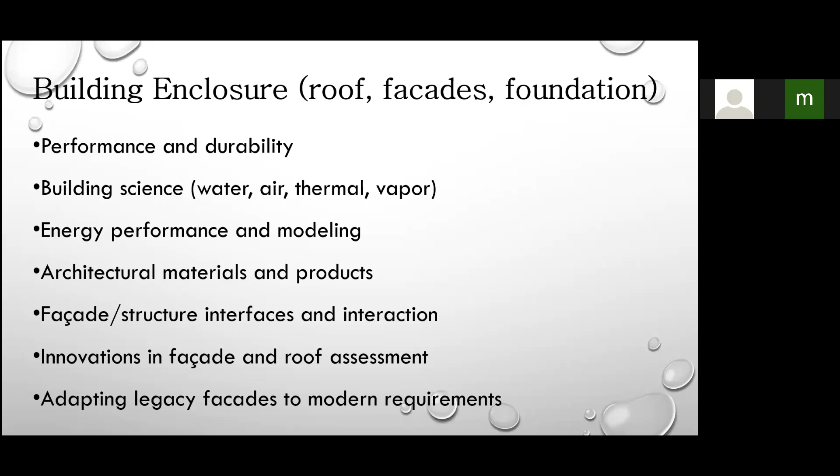Architectural materials and products, facades, structure interfaces and interactions, innovations in facade and roof assessment, then adapting legacy facades to modern requirements. These are building enclosures within the building, and these are relevant to forensic engineering.

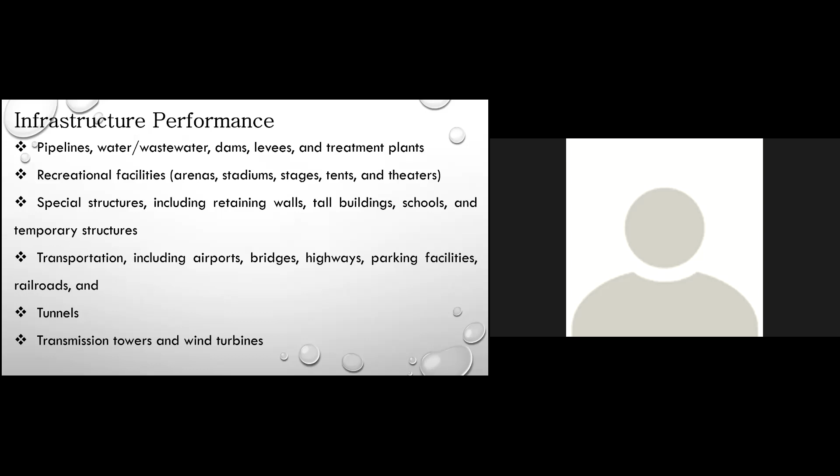Infrastructure performance covers pipelines, water and wastewater—particularly these areas I will discuss in my second presentation—dams, levees, treatment plants, recreational facilities, special structures, transportation including airports, highways, parking facilities, tunnels, transmission towers, and wind turbines.

The natural disasters and extreme conditions: failures caused by tornadoes, hurricanes, earthquakes, tsunamis, blast and impact loading, fires, risk management, emergency response, lifeline engineering. These are the areas or components coming under natural disasters and extreme conditions.

Technologies for forensic investigations, that is the emerging technologies: machine learning, part of artificial intelligence or AI, and building information modeling. Nowadays this has become very popular, particularly in the architecture area.

Structural health monitoring has become extremely important because several government infrastructural projects are being carried out and constructed, where third parties, reputational institutes or organizations, get involved in checking the structural health.

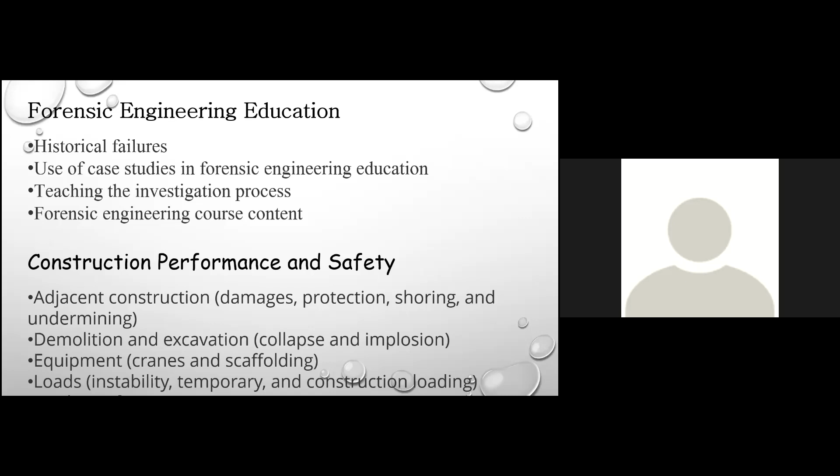Construction performance and safety - I'm not detailing those things, you will get them in my PPTs.

I think the screen is clear to all of you, right? Is it readable? Yes sir.

Okay, fine, so just one small example to give here. When I had been to West Indies, in Trinidad, and I was roaming around the UK and some institutes or organizations, professional agencies in UK, I just happened to ask what is the chance of failure of a bridge or a building in the UK, say. So the expert engineers of a particular organization told that...

They were actually surprised, asking why I was asking that. I told them there is always a sort of likelihood of failures. Then they told the team that possibility is very rare, in our system it is very rare, because our engineering ethics or code of conduct is strictly adhered to, because without which you will not get the professional degree by which you can practice civil engineering.

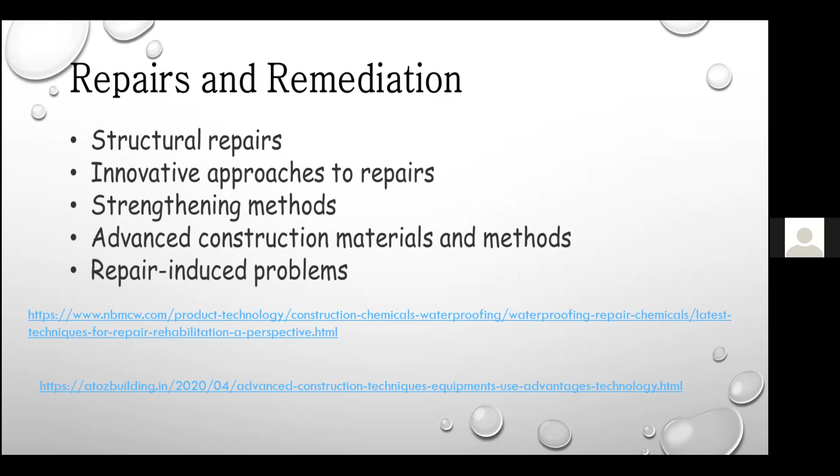Now, concrete, as you know, is widely used: precast elements, and in situ for walls, floors, foundations, etc. And there are some Eurocodes and the equivalent codes here.

That is actually guarding the screen. Can anyone remove that, because it is guarding my presentation here on my screen. Anyway,

that is IS 1199-516, and there are other codes also. I will give the numbers of the codes later. So with regard to strength, durability, resistance, movement tolerance, etc., when the installation is done, forensic examination is required.

Can I? Oh, right. Now it is okay.

Now, there are a number of techniques available for forensics and failure analysis, which may be split into two categories: site investigations followed by laboratory analysis. All of you know that this is nothing new. Site investigations start with an initial desk study based on information: the topography, the site plan, the key plan, then the design, then the drawings, GA drawings, general arrangement drawings.

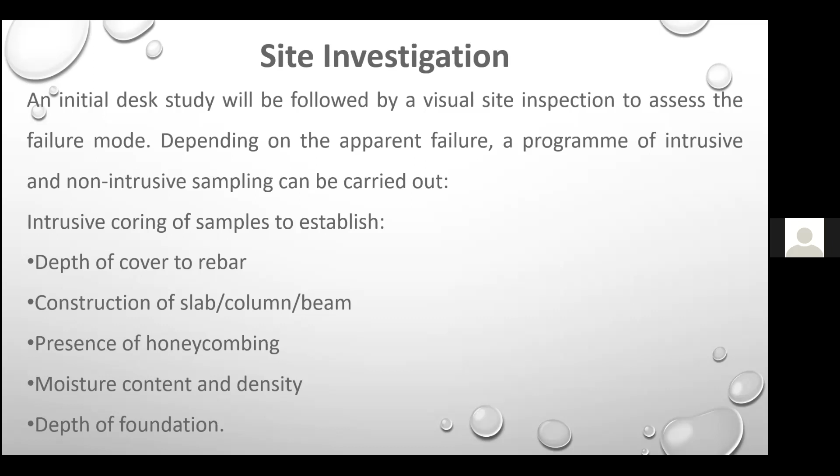So these are the intrusive sampling, while non-intrusive investigation includes mapping of rebars using Hilti Ferroscan. I don't know how many of you are familiar with the Hilti Ferroscan or other ferroscans. Hilti is a special group attached to that, so it is a sort of ferroscan basically.

So I'll show short videos on this ferroscan, then the ground penetrating radar or GPR, then estimating the compressive strength using Schmidt hammer or Windsor pin, presence of movement joints, drop hammer testing of screeds to establish strength, slip and skid testing of surface, particularly in highway engineering, and half cell potential also.

So some of these are defined here. For example, the half cell potential is used to determine the probability of corrosion within the bar in reinforced concrete structures. And movement joint videos I have included in my PPTs; I will show that. And to assess if your screed is adequately compacted, in case of highway construction. Now here, this is a video where you will see this one.

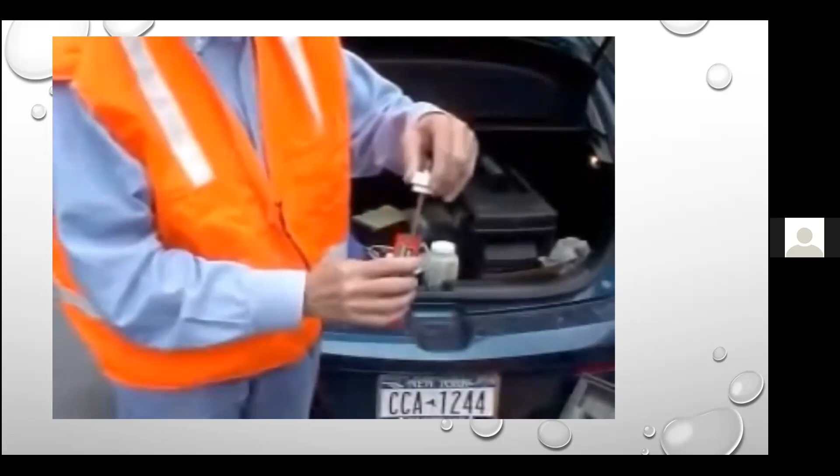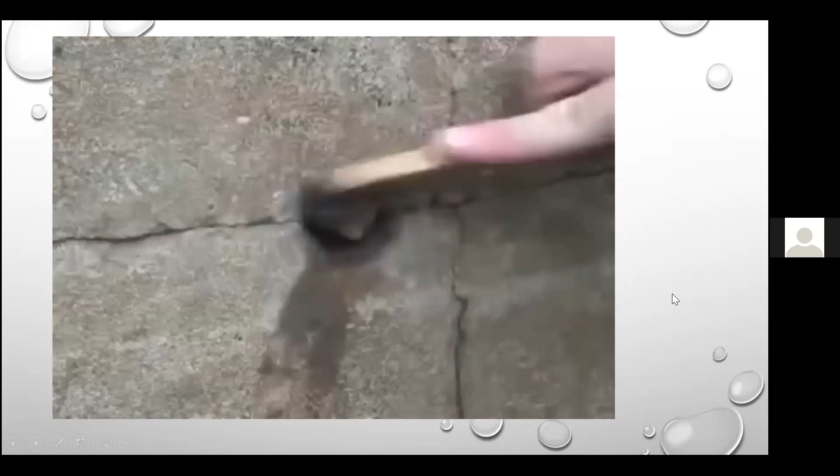Just let me know whether... I think this video is not audible, right? Is it audible, sir? Is any voice there for this video? Are you not able to hear this? No, I'm not able to hear this. Okay. Participants, can you hear? Just one moment. No. It's not coming. No, sir, no voice is there. Still no, sir. Just one minute. Can you hear now? No, sir. I don't know why; it is the audio setting.

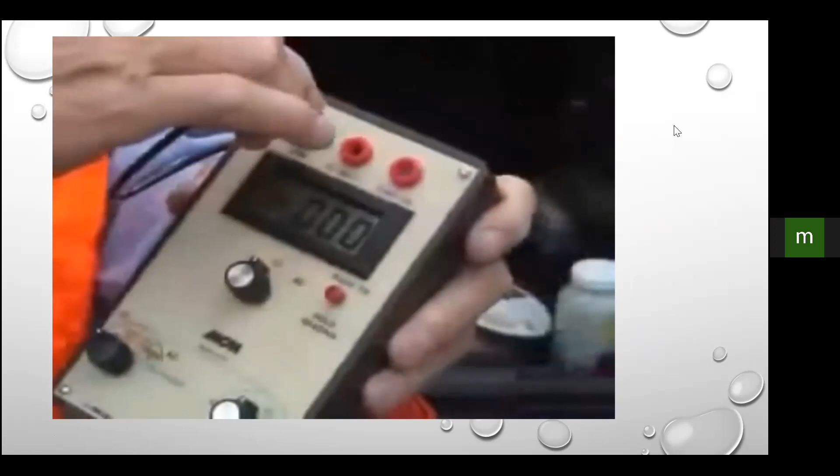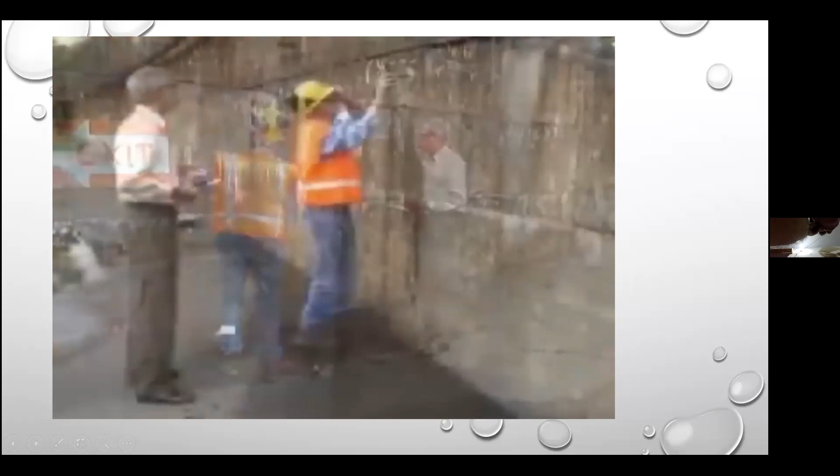Can you see? Can you hear? No, sir. We can see, but it is not audible actually. We can't hear any voice. You can't hear? Yes, sir. I don't know actually how to fix it. But you can see, right? Yes, sir, we can see. Can anybody help in this regard? We can see, but you just explain this one. It is not audible to us, so you can explain the things.

A wet sponge is placed between the porous plug of the half cell and the concrete wall to complete the circuit. Potential measurements are taken. This is a demonstration of ASTM C876, the standard test method for half cell potentials of uncoated reinforcing steel in concrete.

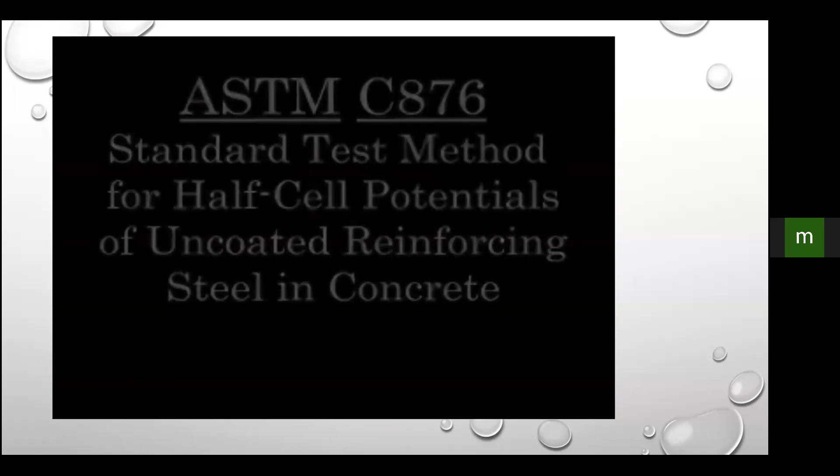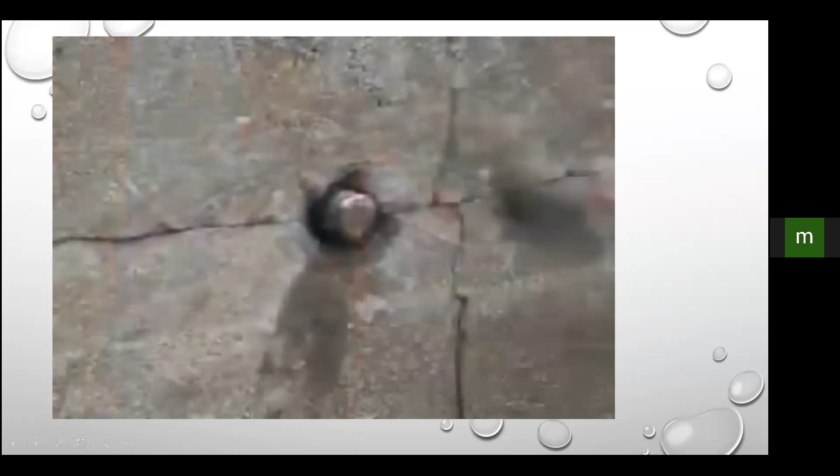A copper sulfate solution is poured into the half cell container. A 1/4-inch diameter copper rod is then immersed into the copper sulfate solution and the cell is sealed. The half cell is then screwed onto a voltmeter, and the protective cap is removed to expose the porous plug at the end of the half cell. The negative lead from the half cell is connected to the voltmeter, and a long positive lead is also connected. Rust is first cleaned off of an exposed reinforcing bar protruding from the concrete area to be tested.

The red positive lead from the voltmeter is then clamped onto the bar. Prior to measurements, a grid is laid out with 1-foot spacing spanning across the concrete surface to be tested. A wet sponge is placed between the porous plug of the half cell and the concrete wall to complete the circuit. Potential measurements are taken at each intersection along the grid.

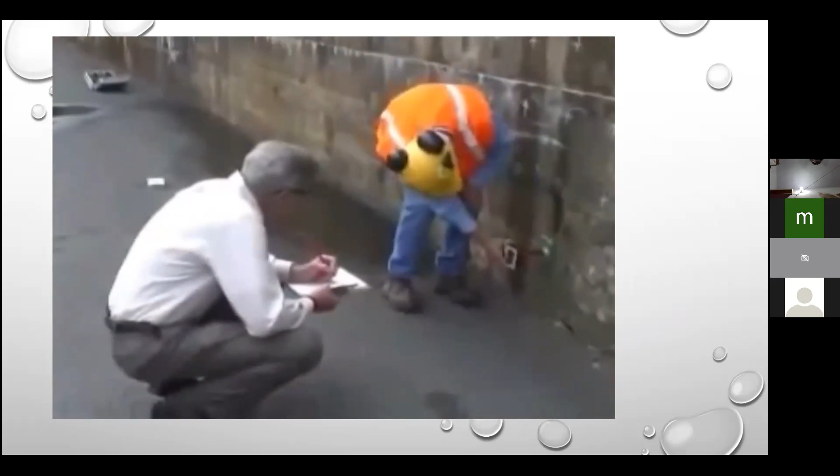The measurements and their corresponding locations are recorded, and this data is used to generate a contour map of potential corrosive sites beneath the concrete surface.

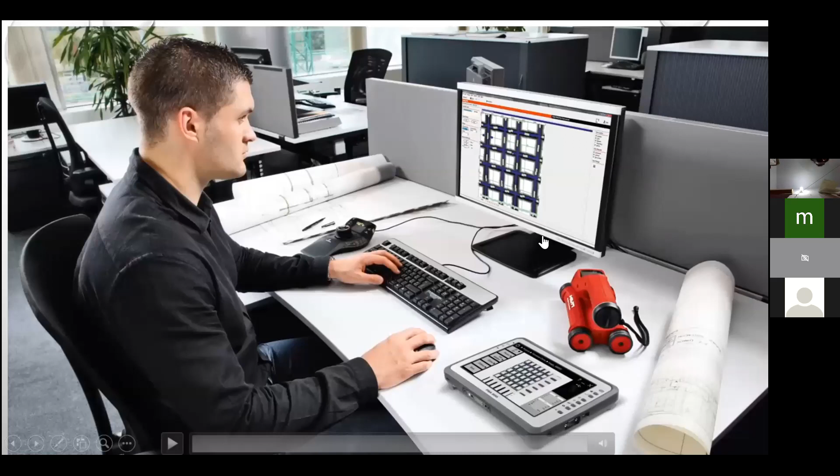So I think all of you have been able to hear and see the video. Yes, sir. Okay, good. So now the next video I'm starting.

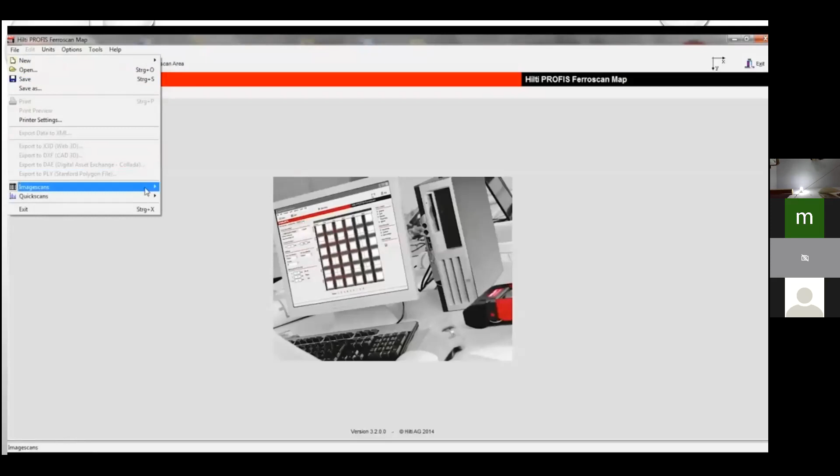This tutorial provides an overview of the Hilti Profis Ferroscan map software and explains its main applications. Please point out if you cannot hear. This software is designed to arrange multiple image scans or quick scans recorded via the Hilti Ferroscan on a virtual wall. The resulting map shows the rebar layout and depth of concrete cover. Different colors can be assigned to indicate and visualize individual depth layers. The area visualization and provided statistics give you a solid foundation to form your decisions.

Now we'll go through how to optimize the handling of large amounts of scan data. First, the scan files need to be analyzed in Profis detection before you import them to the Profis Ferroscan map software. This step enables the processing of scan files from a complete project. In the Profis detection software, the Ferroscan batch processing function automates the analysis of large amounts of data. After the batch processing is complete, you can open the Hilti Profis Ferroscan map application.

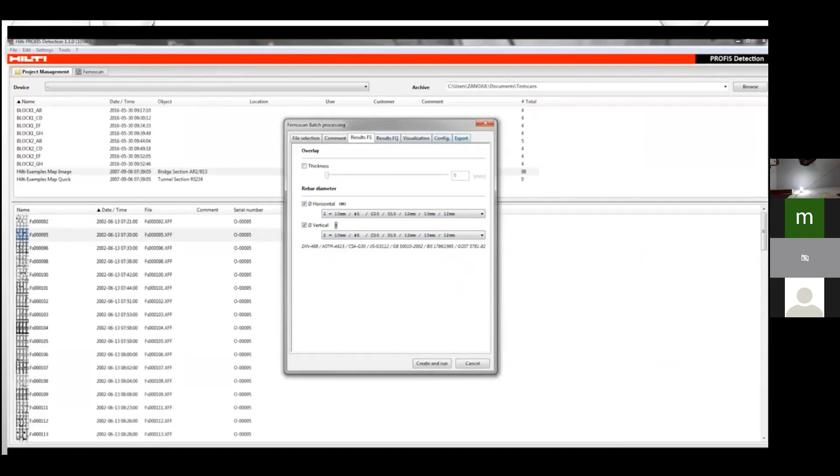Within the application, you can change the basic settings for language, length unit, metric or imperial, preferred color map, and the archive folder. The color map allows you to assign color codes to different depth ranges for better visualization of areas with inadequate concrete cover. The toolbar includes options for opening an existing Ferroscan map project or creating a new map for quick scans or image scans. Let's create a new map to show how these features work in practice.

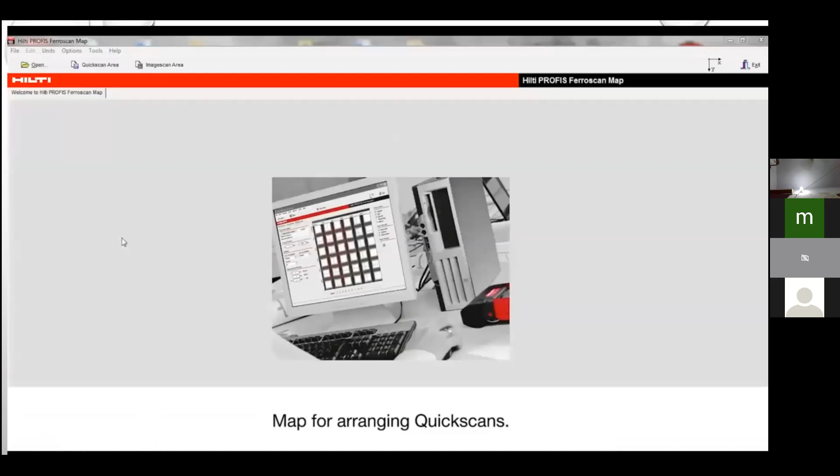Create a new map file by clicking the Quick Scan Area button. Enter the project information in the virtual wall properties, including dimensions and the distance between the scan lines. Select a project folder from your archives and import the analyzed scan files for mapping. To arrange the scan files in the correct sequence or order, select Advance Direction and Scan Direction using the arrow symbols. The start position where the first scan will be inserted is shown.

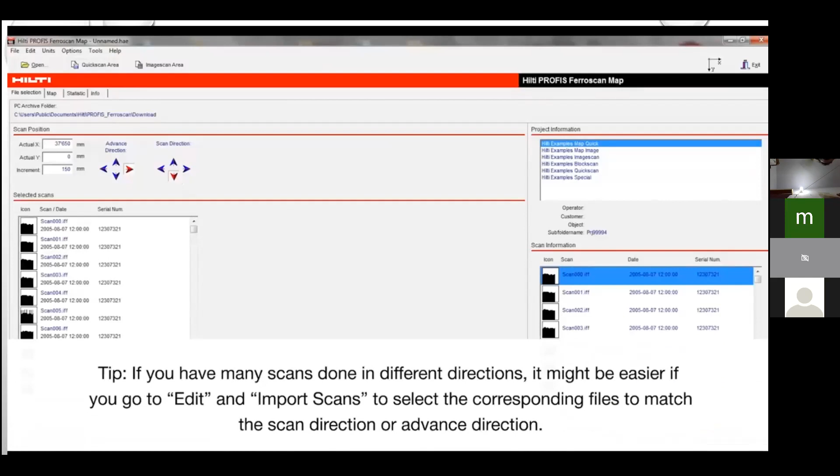The upper left corner is the default point of origin for the map visualization. Each subsequent start position is advanced to the amount in the Advance Direction increment field. The scan direction is the starting position of the quick scan recorded via the Ferroscan. Depending on the sequence scanned, choose to add selected scans individually or add all scans. Once you've placed the scan files, the multiple quick scans will appear arranged on a virtual wall for depth of cover analysis. In large area visualization, use the zoom function to see more detail.

Remember, you can adjust the map's color code according to your needs and preferences. A good first step for evaluating the area is looking at the statistics overview. This may give you ideas for setting the color map and further processing of the viewing settings. These statistics results are dependent on

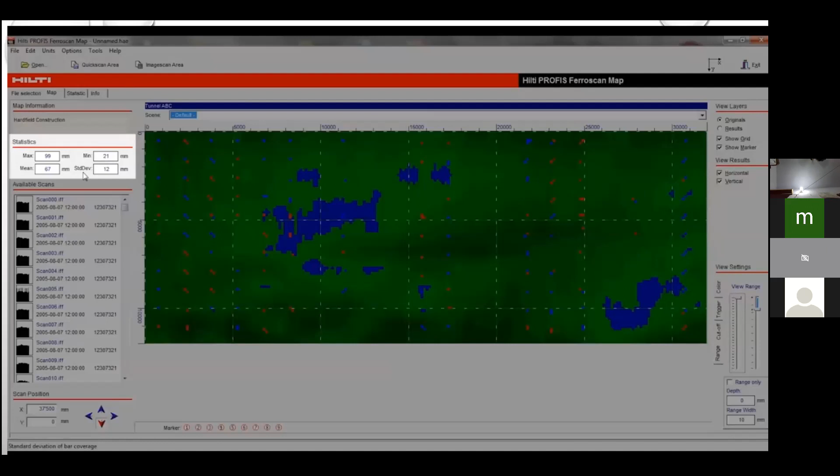Hello. Yes, sir. So it was audible? Yes, sir. It was audible. Okay, okay. But where is my PowerPoint? So again, you can share your screen. Actually, yeah, I have to now. Yes, sir. It is visible, sir. You can do it full screen. Yeah, it's okay, right? Yes, sir. So I should go back to the.

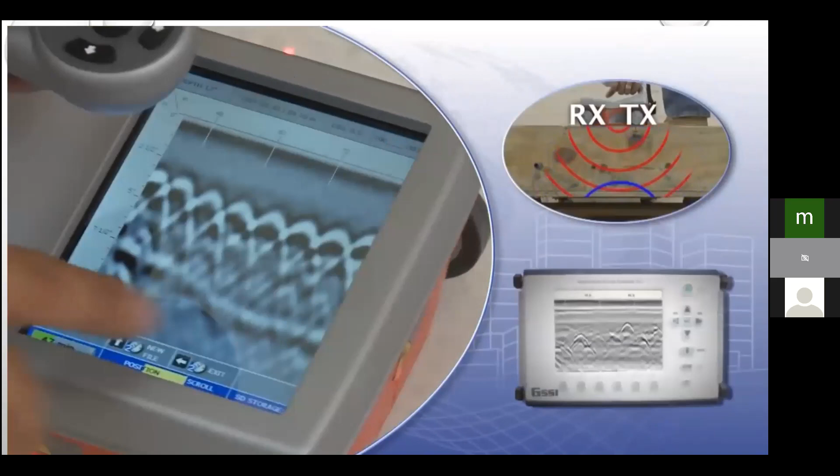Now the video is not playing. Lost. You are not able to hear, no? No. Yeah, just now. No. Can you hear? No, we can't hear. You can't? No, sir, we can't hear. We can see, but we can't hear.

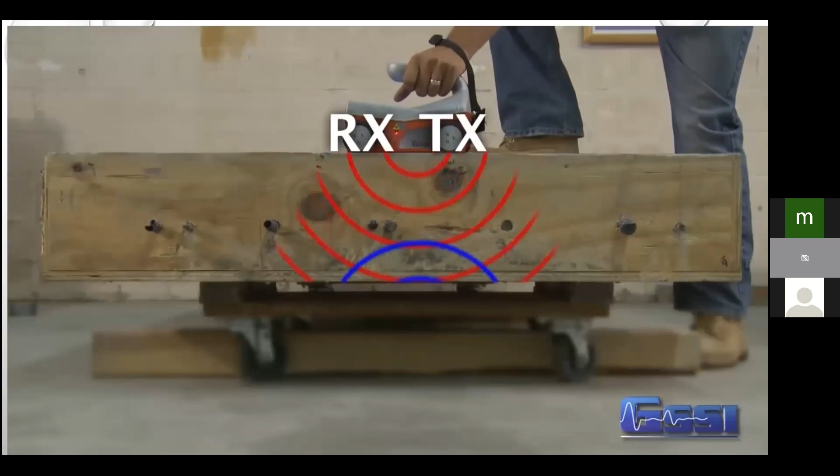Systems are typically comprised of three elements: the control unit, the antenna, and the survey encoder. Depending upon your application, your GPR system may differ from the one illustrated here. For example, the StructureScan Mini contains all three components in one dedicated system. The antenna has a transmitter and a receiver. When the signals are returned to the antenna, we record a two-way travel time and the amplitude of the signal. The amplitude is simply the strength of the signal coming back.

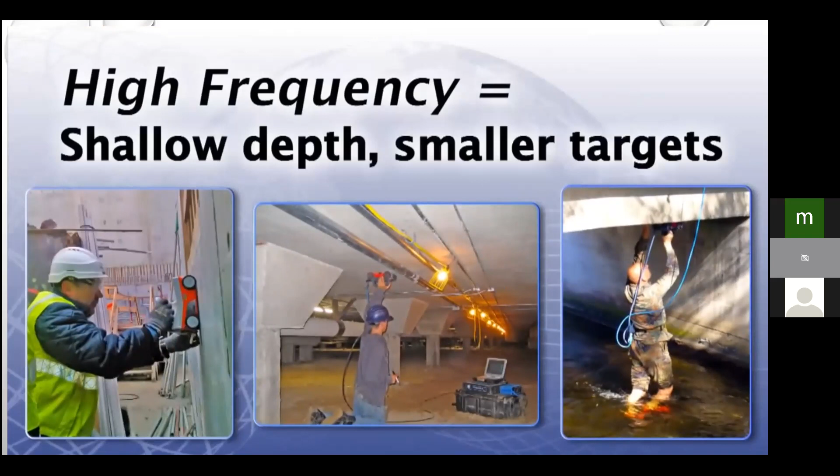Antennas come in various frequencies, depending upon your application. High frequencies are for shallow depth and small targets, ideal for concrete applications. Low frequencies are for typically deeper depth and larger targets, such as utility, geological, and archaeological applications. Survey areas with high conductivity can limit the depth and effectiveness of ground-penetrating radar. An example of this would be clay soils, or uncured or green concrete.

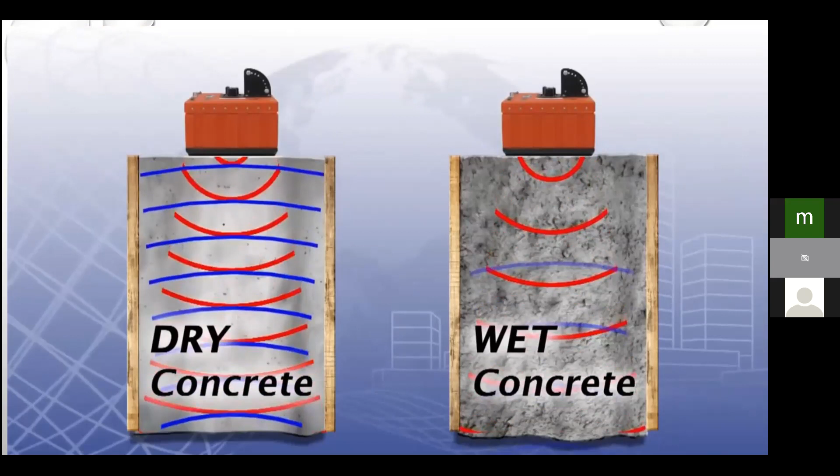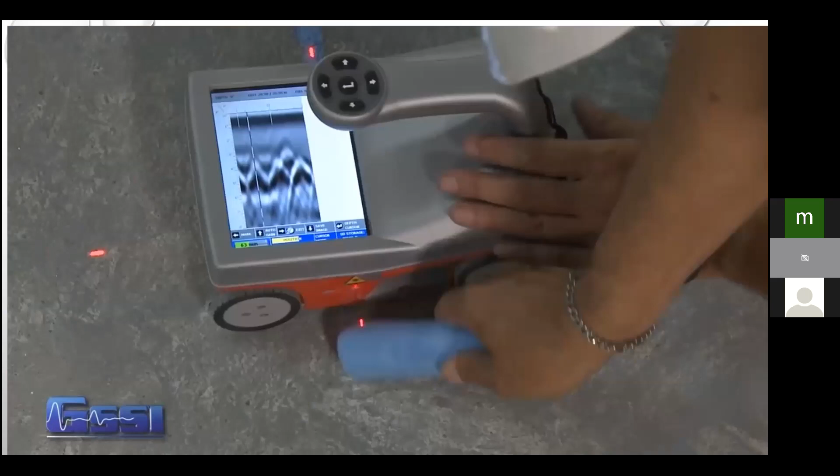Through different mediums, a value is assigned to these mediums to represent different velocities of radar. This value is called dielectric. Dielectric is important so the depth of targets or layers can be accurately estimated. Air has a dielectric of 1, which means radar travels fastest through air. Water has a dielectric of 81, which means radar travels slowest in water. Every medium in the world falls somewhere in between.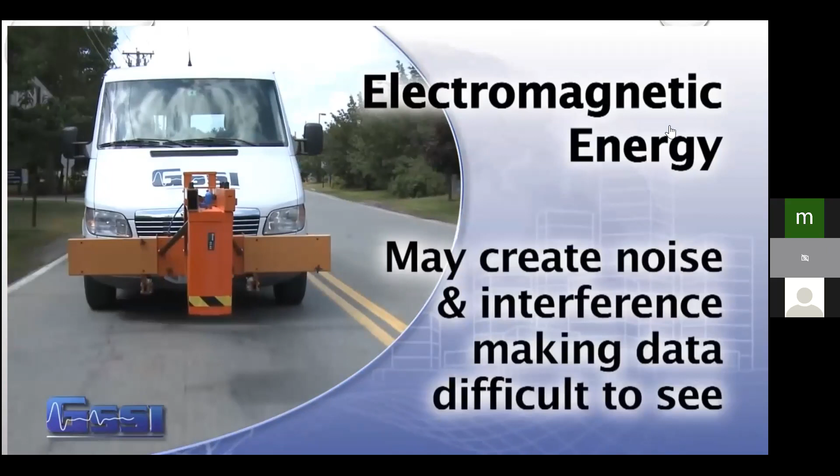Lastly, remember that GPR is electromagnetic energy. Other sources of electromagnetic energy, such as cell phone towers and two-way radios, may interfere. These will not cause any damage, but may make it more difficult to see deeply into concrete or soil. In addition, unlike X-ray or other technologies, ground-penetrating radar is not harmful and has no site restrictions associated with use. This brings us to the conclusion of the theory and fundamentals of ground-penetrating radar. For more information on data interpretation and specific applications, please visit www.geophysical.com. Thank you.

So, was it visible or not? I am not sure. Yes, sir. Hello? It was audible and visible. Okay, fine.

So now you have seen 3 videos. One was related to the half cell potential to determine the corrosion probability or the extent of corrosion. The second one is the ground penetration or the ferroscan. Hilti is a company, the Hilti ferroscan; they are specialized in this field. And the third one is the ground penetration radar. So these 3 you have seen.

So let me now go to the next slide. Is it clear? Is it visible on the screen, the slides? Yes.

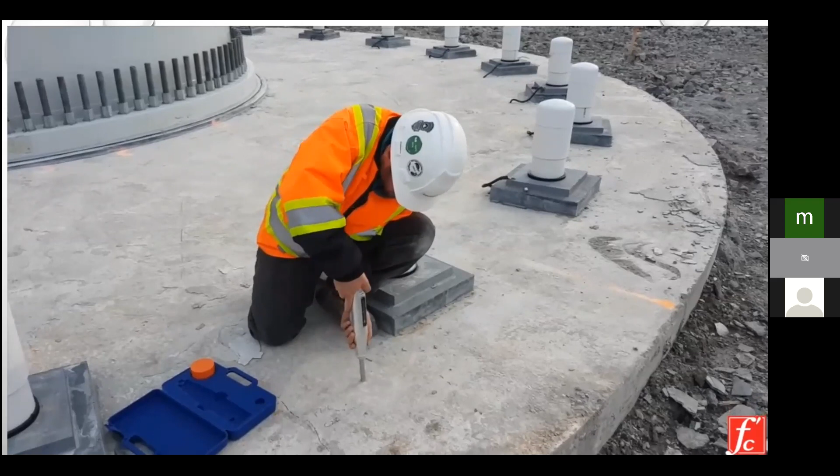In this video, we'll be covering a quick review of the rebound hammer testing method. Since its introduction in 1948, the rebound hammer has become extremely popular, mainly for its simplicity and ease of use. It is an inexpensive and quick method for non-destructive testing evaluation of concrete hardness. The main applications for the rebound hammer are to assess the in-place uniformity of concrete and to estimate the in-place strength of concrete if a correlation is developed. As listed, there are several standardizations that currently exist for the rebound hammer.

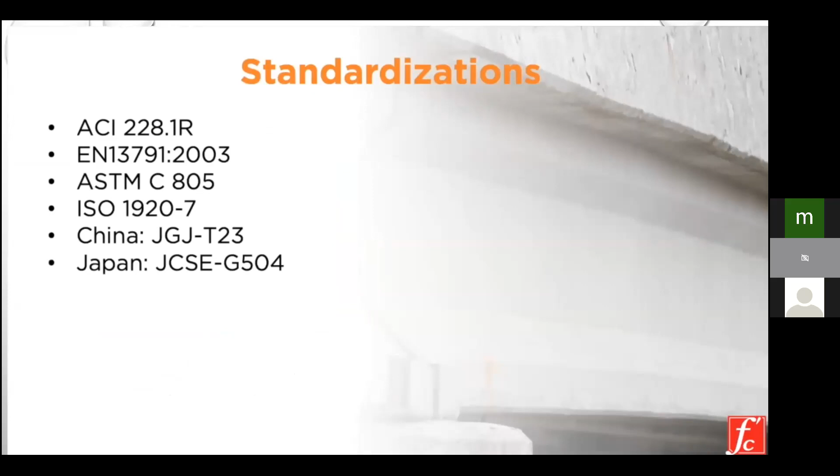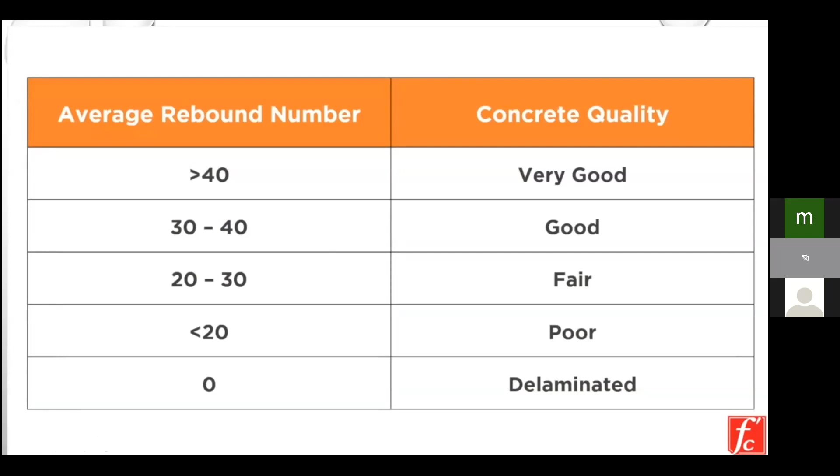In order to test, the plunger is pushed against the concrete perpendicular to the surface. As the hammer body is pushed towards the concrete, the force causes the latch to release and make an impact on the concrete. Essentially, the rebound of the spring-driven mass is measured after its impact with concrete surfaces. The output of the rebound hammer is then referred to as the rebound number, and this is correlated with the surface hardness of concrete. A higher R number means higher concrete hardness. The rebound hammer can be placed in many configurations, including upwards, downwards, at any intermediate angle, and horizontal.

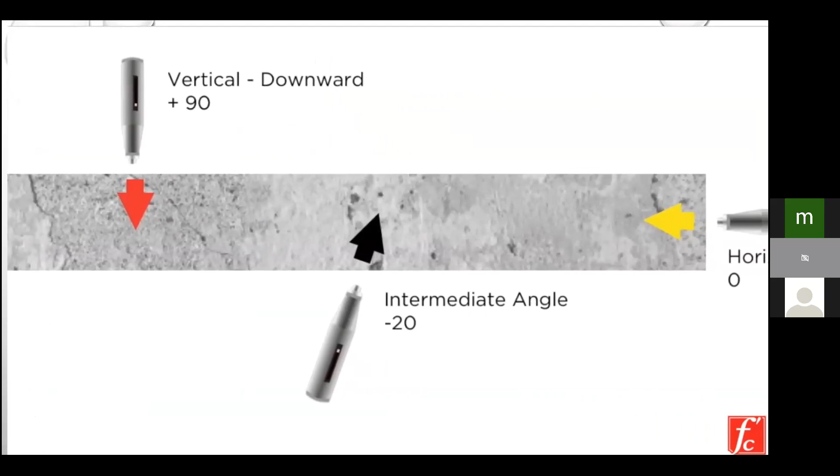Inspectors should pay attention to the following considerations prior to conducting a rebound hammer test. The testing surface should be at least 150 millimeters in diameter. The surface should also always be smooth before testing. If there is any free moisture or water on the concrete surface, it must be removed.

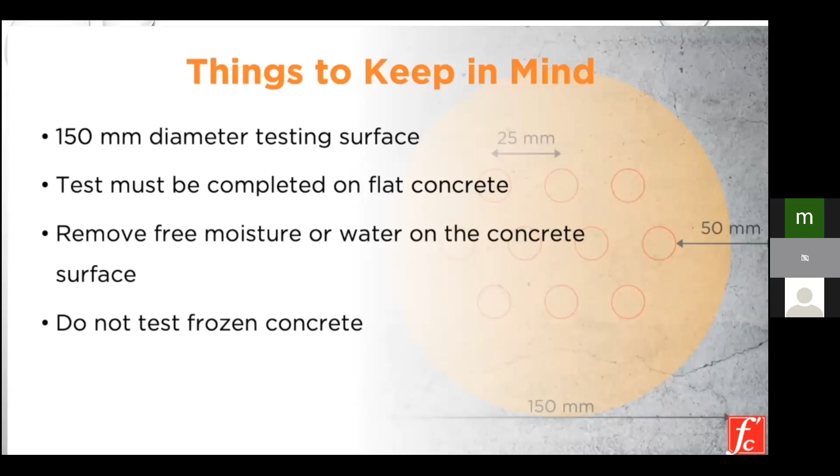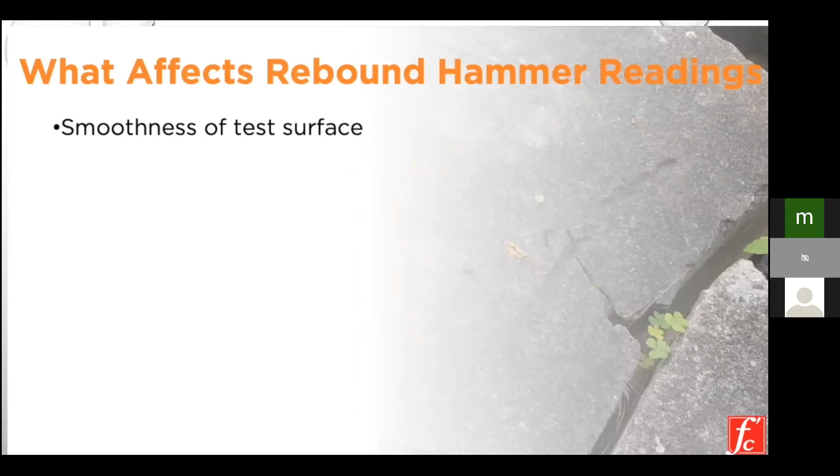And finally, it's important not to test on frozen concrete, and concrete should only be tested after it has thawed, since frozen concrete tends to have high rebound numbers. Although the rebound hammer provides a quick, inexpensive means of checking the uniformity of concrete, the results can also be affected by the following parameters: smoothness of the test surface, size, shape, and rigidity of the specimens, age of test specimens, surface and internal moisture conditions of the concrete, type of coarse aggregate, type of cement, carbonation of the concrete surface, and type of mold.

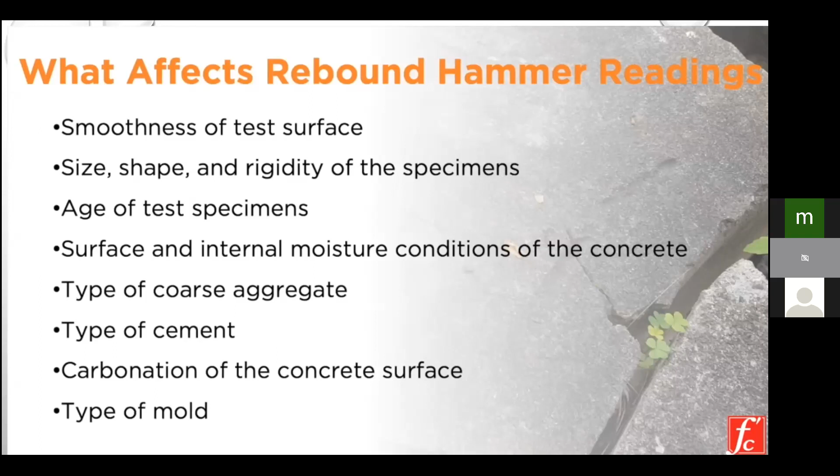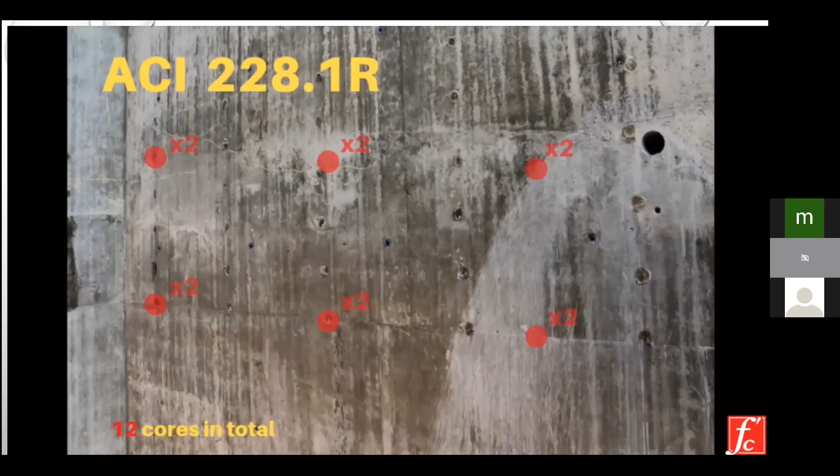Although no theoretical correlation exists, certain relationships are applied to convert rebound values to strength values. The ACI 228.1R and the EN 13791 have certain guidelines in order to evaluate compressive strength of concrete. According to the ACI 228.1R, in order to establish a relationship between the rebound number and the concrete strength, inspectors should take a minimum of 2 replicate cores from 6 or more locations. According to the EN 13791, 1 core should be taken from 9 different locations.

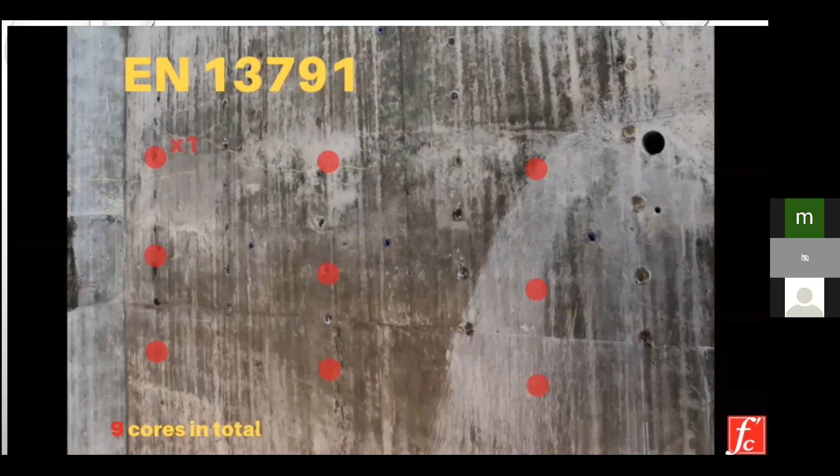With recent advancement in sensor technology and development of wireless communication, a new generation of rebound hammers are commercially available. Recording and tracking job-specific details including hammer angle and on-site verification of test results was time-consuming and prone to errors. The new generation of hammers help engineers get around these issues. For example, new generation hammers apply real-time checks on the quality of datasets and do not need to be adjusted for the configuration of the hammer.

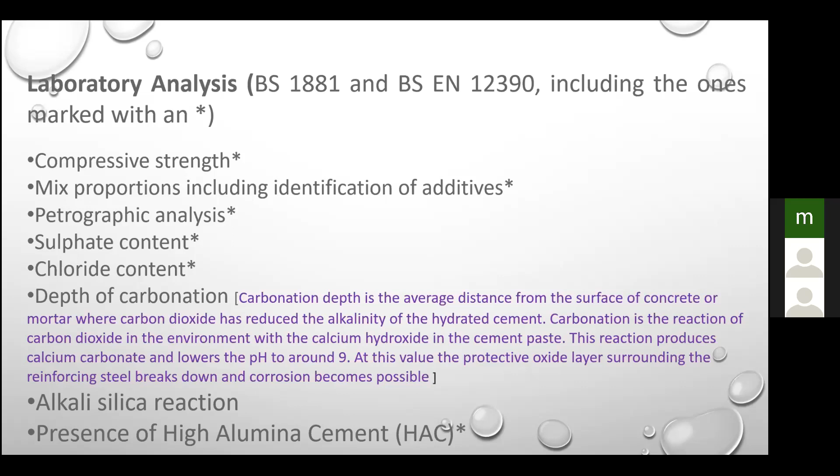Then alkali silica reaction, presence of high alumina cement. The petrographic analysis, and let me talk regarding the earlier one. In India also, in our country, there are multiple codes addressing this test. I think many of you may be knowing. If you are interested, you can just search on Google or any search engine, and you will get the IS code number also. Some of these I can provide later.

Petrographic analysis, as you see, is a diagnostic tool for examining failures in concrete. Here first the visual examination is carried out in order to ascertain the possible causes of the problem and to determine the best position for taking samples. And then you are sure that from a particular zone or position you have to take the samples, and then take core samples to the laboratory for petrographic analysis. That could be done through SEM and polarized light microscopy, and other methods are there. Candidate methods are there, and you can be guided by these British and US standards, ASTM and BS, the numbers given.

Now, benefits of this petrographic analysis: determining the present condition of previously placed concrete, so that the decision to reuse or replace can be made. Establishing the root cause of surface scaling, spalling, aggregate pop-outs, and abrasion. Popping out, I will give a figure later.

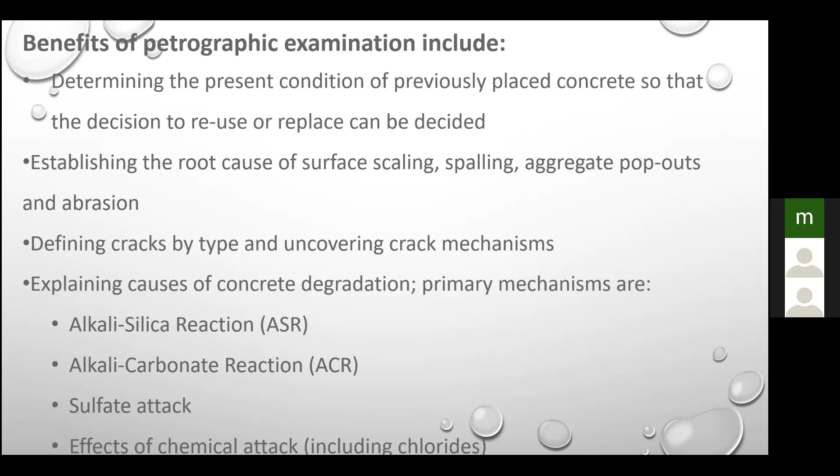Defining cracks by type and uncovering crack mechanisms, then explaining causes of concrete degradation, primary mechanisms. These reactions or mechanisms are listed here, and I have provided the link here, through which you can get the detailed procedure to find out the parameters which determine that forensic examination, or petrographic analysis in particular.

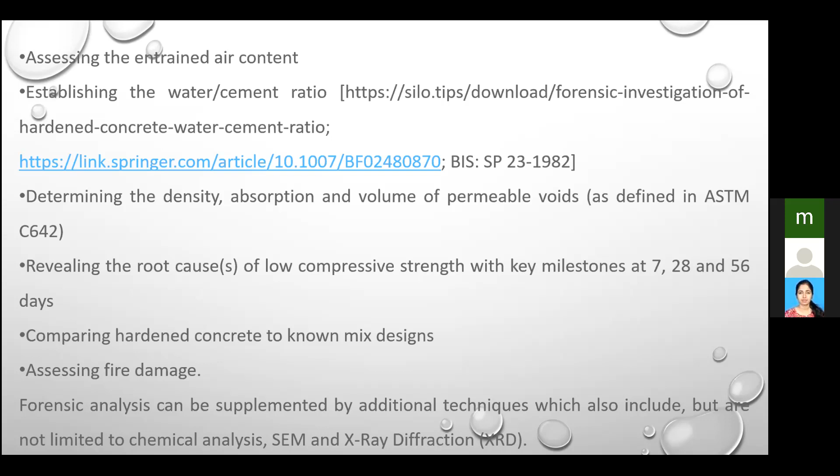Now, concrete admixture testing. As you know, admixtures are commonly used to control concrete flow, shrinkage, air entrainment, setting times, both retarding and accelerating, water reduction, and corrosion inhibition also. So for that also procedures are there to test or analyze the admixtures which have been used or are to be used in concrete.

So here you see the tests which should be included. I cannot see this, it's guarded, this one. Can all of you see the top line? I suppose it is 9103 that gives this admixture testing, because I am not able to see the top line here.

Okay. Can you hear me, Dr. Madhulisha? Yes, sir. Okay. So can you see the top line? From here I can't see it on my screen because it is guarded by some icons. Now the top line is like the test could be conducted according to BS EN 934, right? Yeah, that line we can see. Okay, but I can't see, so that is why I was guessing. I was wondering whether the code is visible or not. Yes, sir, visible.

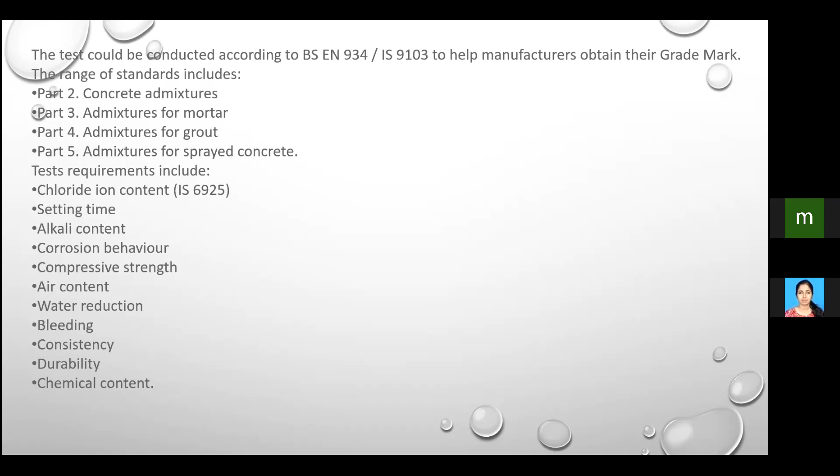So counterpart IS codes are there for each and every one of these parameters. I think many of you have been using these IS codes for different purposes. IS 456 2000, all of us know. But apart from that, admixtures, hydrated cement, OPC, ordinary Portland cement, the testing of chloride content, IS 6925. These are in multiple codes, but they are available.

Then raw material evaluation, this is very important. As you know, concrete or mortar comprises cement, sand, water, aggregates. The cement may originate from limestone, shells, chalk or marl. Marl is a special geological rock type, combined with shale, clay, slate, etc. Here you can see just a glimpse of how cement is manufactured.

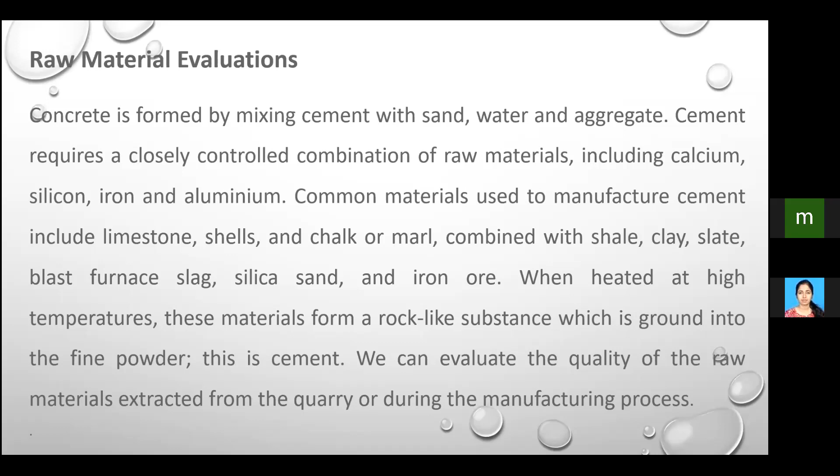And as all these ingredients are required as raw materials to manufacture cement, obviously the quality of the raw materials has to be ensured also. I'm not going into the details of that. You can see this later.

Next, concrete repairing agent testing. When concrete is repaired by grouting or other means, by epoxy painting or some resins, how can you test it? That is also in some codes. I cannot right now say the counterpart IS code number, but here BS EN 1504 is there, and this is harmonized with the European counterparts.

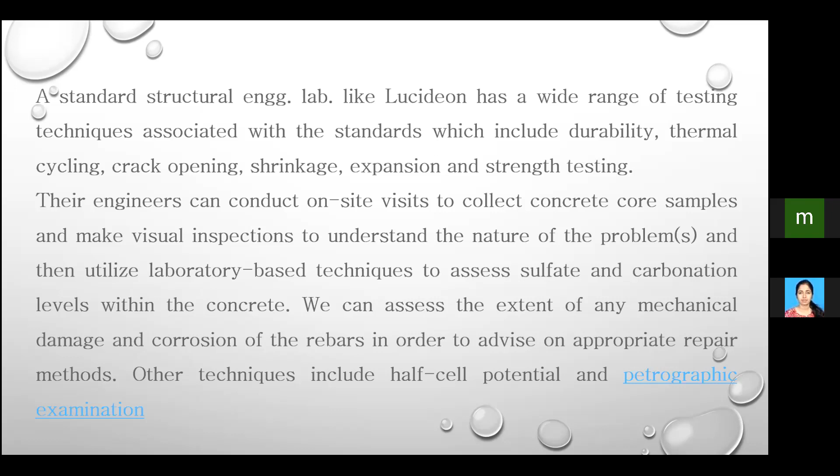So this is about a particular structural engineering laboratory, Lucideon. It is an international company. They have the expertise and facilities for forensic examination in different areas of civil engineering. This slide speaks about that. These are the different codes. Skipping this one also.

So this is all about the first presentation. This is open for discussion.

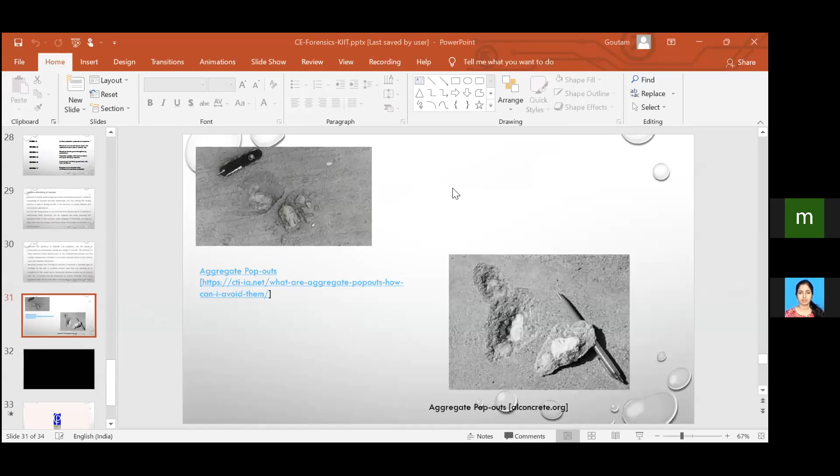If I just briefly go through the procedure: all civil engineers know how the sewerage system works. They collect wastewater from domestic units and establishments, which is taken through pumping sometimes, or by gravity, and it reaches the treatment plant where it is treated. So the sewerage system is the first one.

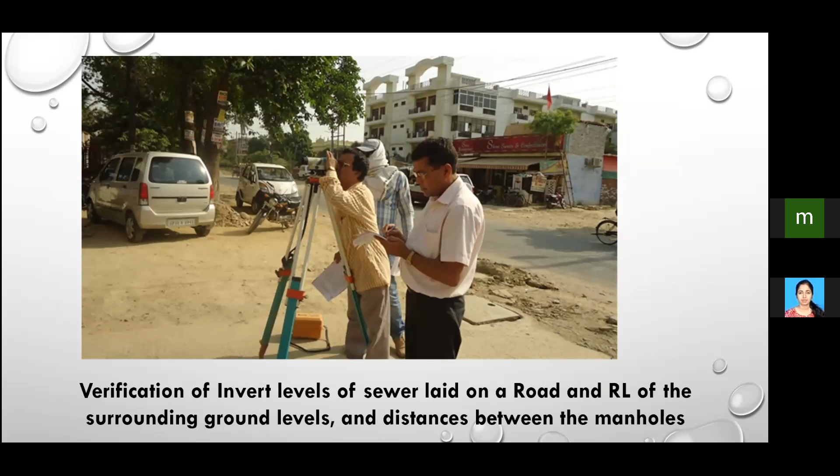This is the checking of the invert levels in a particular sort of place, and the distances between the manholes was also seen, whether it was correct as per the requirement or tender document or so.

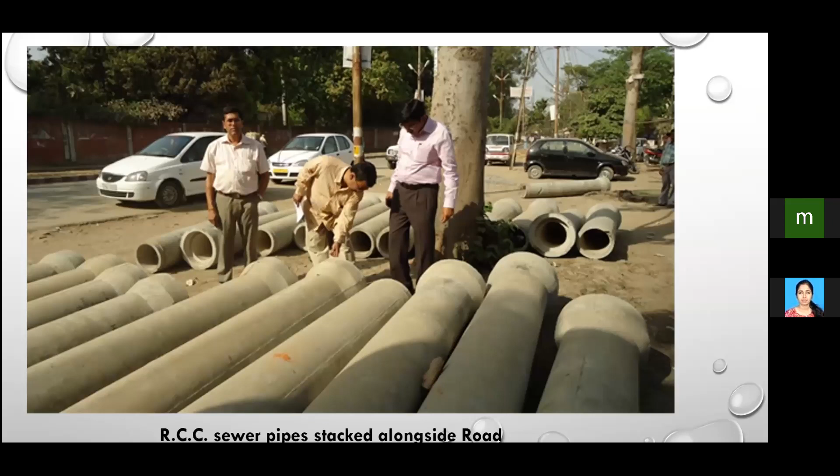Then checking quality of sewer pipes. So we literally checked, as you see that I was just touching the pipe by bending this one. That is myself, checking by physical examination whether the diameter of the pipe is okay or not, the diameter, the thickness, the wall thickness. So we were checking that and recording this one.

Then the RCC pipes damaged at one end. So this actually, why did this happen or so? We took the samples to the laboratory and analyzed them, checked for strength, and did the reporting. Whether the sewer pipe was as per the tender document or as per the contractor's version, we were checking, taking the reinforcement in a particular pipe at random.

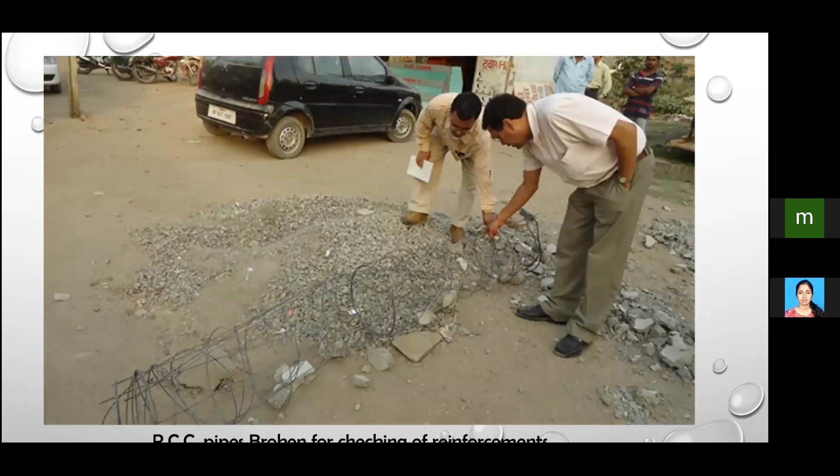We got this pipe broken, sewer pipes, and we checked the weight. Here you see the reinforcement cage, a pipe which was already damaged, or some pipes at random we took and got it broken totally. Then the reinforcement cage we got, and that is visible here. Same thing for another pipe, and we were checking the weight.

As you know, the sewer reinforced pipe or RCC pipe is given a particular grading, say NP4 or NP3, non-pressure pipe gradation. This was documented in the tender and was supposed to be laid by the assigned contractors. So we checked whether the sewer diameter maintained that, or whether inferior quality sewer pipes were used, in terms of the reinforcement requirement. That we physically verified, as you see here.

So we took the weight of that near this workshop, and we saw the percentage of that compared to the total pipe weight, and whether the given or stipulated percentage was at all okay or not. So that we checked here.

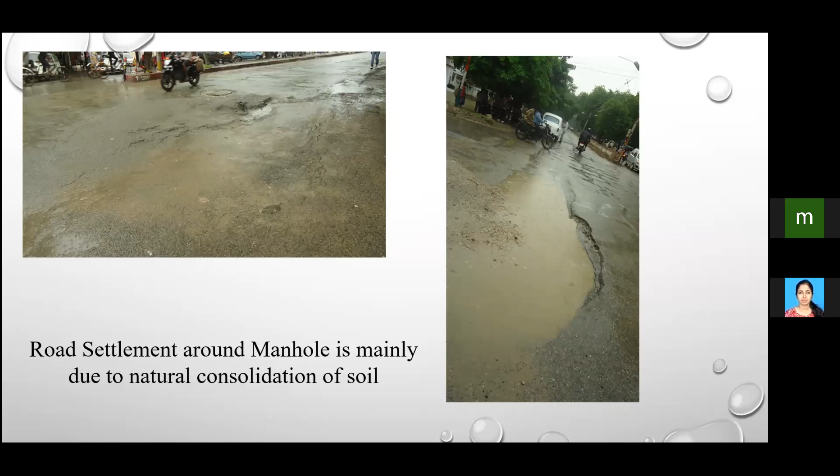Now here you see the road settlement around the manhole is mainly due to the natural consolidation of soil. While constructing the manhole, there were some manholes which were wrongly constructed or not constructed properly, and that led to the breakage of roads or settlement of the road, as you see here. In a lot of places, particularly during this monsoon period, the road got settled and the manhole broke. You can see this road settlement near the manhole.

These we checked physically, and we took samples and got them tested in the laboratories or the nearest concerned laboratories, NIT Allahabad, sometimes our own place, sometimes IIT Kanpur, or some other reputed organizations also.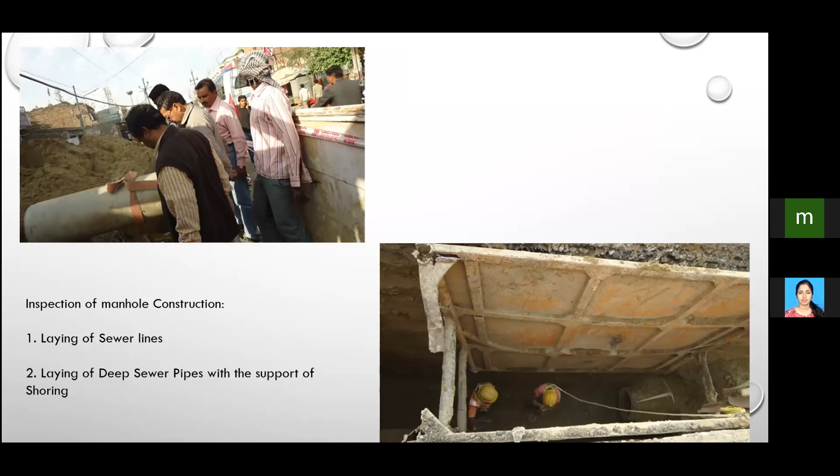Here you see that when it is a deep laying, the sewer pipe on the right side is actually 9 meters deep. So the sewer pipe was being laid 9 meters down below the road surface. We physically verified whether the procedure followed was correct or not, and how the laying process was going on.

Once a particular sewer line had already been completed, we tested whether the wastewater or sewage flow gradient was given correctly, since we could not break the sewer line by excavating and damaging the road. So what we did was pour water from a tank nearby. You can see the tank nearby. From there we were pouring the water, and from another manhole we were checking whether the flow was okay or not, and we were also observing the velocity.

From a particular manhole, when pouring started, at the other manhole a particular distance away, 30 meters or so, 100 feet around, we measured how much time it took. Inside the manhole, a float or very light material like thermocol was used to see the flow, checking whether the minimum velocity of 0.6 meter per second was maintained or not.

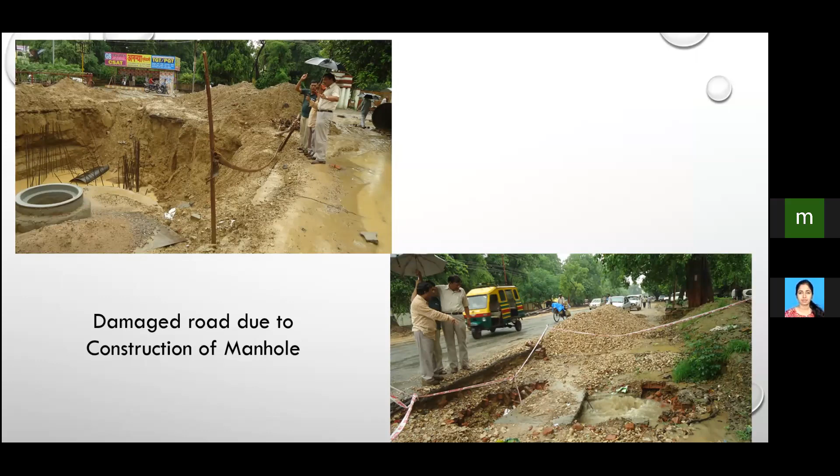We saw this, and you can clearly see that the manhole was being constructed alongside the road, but no shoring or protection safeguard measures were taken, and because of this, some parts of the road got damaged.

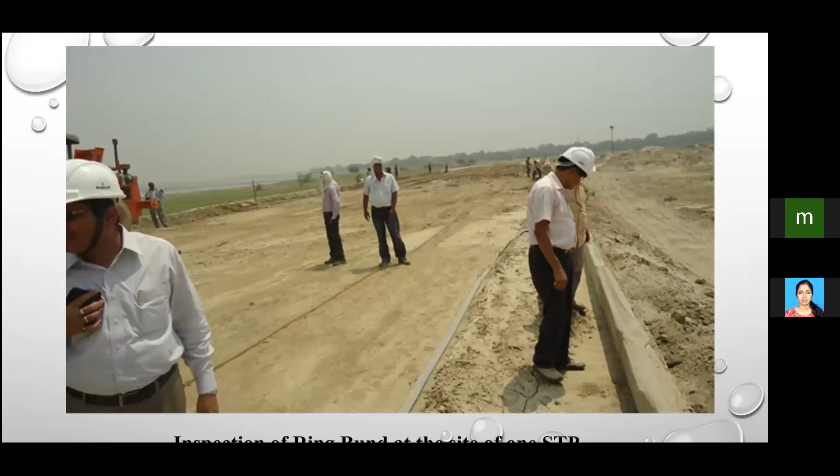Now, inspection of the sewage treatment plant, partly operational and partly under construction. This is the ring bund, which is given for any site - maybe an airport, a sewage treatment plant, water treatment plant, or other civil engineering structure requiring a wide area. What we do is measure that.

We take the statistics of floods, the high flood level or highest flood level, and the treatment plant or that particular civil engineering facility that is going to be constructed must be safeguarded against likely flooding. For the reference flood level, the year 1978 is normally taken, for ongoing constructions also.

We collected these figures from the irrigation, minor irrigation department, and public health engineering department, and checked whether the ring bund level was above the high flood level, so that the treatment plant, once constructed, doesn't get flooded or inundated.

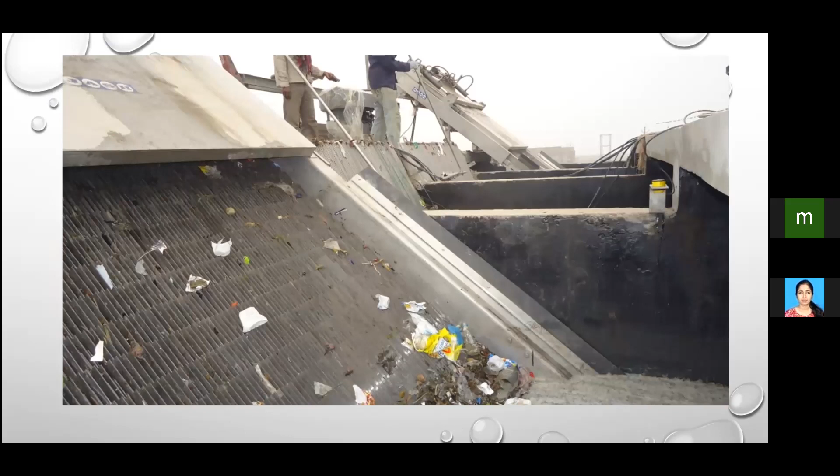This is the screening angle, and we also checked the screen size and perforations. All these pertinent components we checked physically.

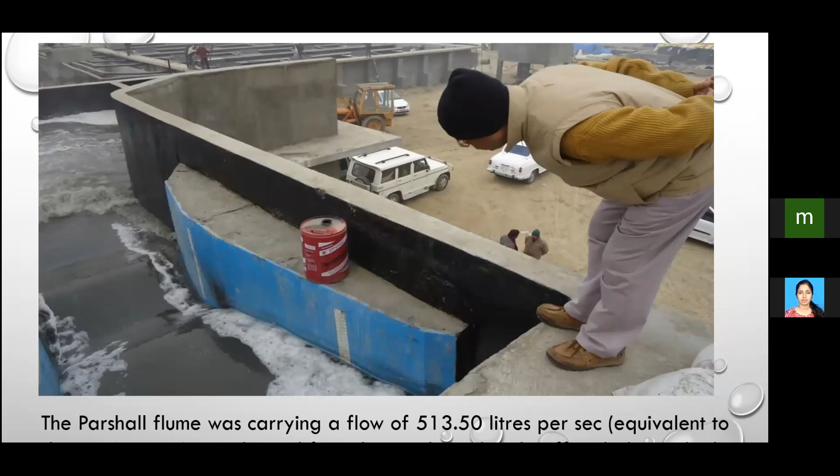And the flow - the Parshall flume, which all of you civil engineers should be familiar with - measures flow and is a flow control device, a hydraulic control device. All of you who are civil engineers must have read about this in hydraulics or water resources courses, so the Parshall flume was definitely included in your teaching.

So this is the practical, field Parshall flume, and we actually checked it. As you see, there is a graduated scale on the wall of the Parshall flume, from which we collected the data on the actual flow that happened to flow down through the treatment plant, and we checked that.

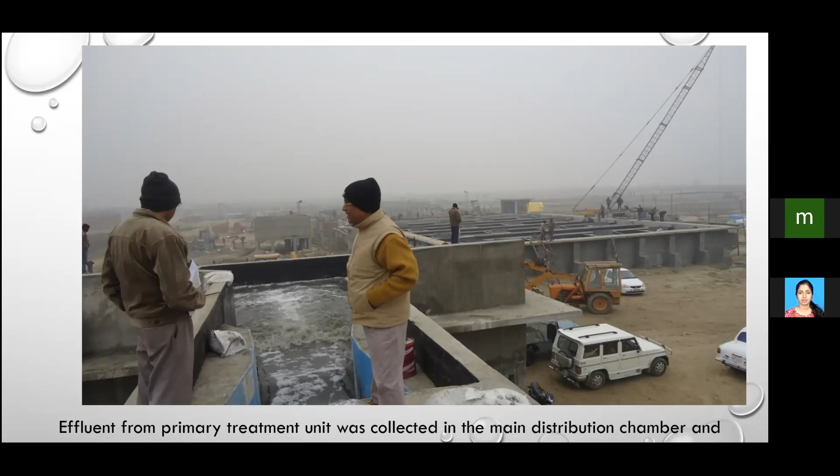This is another one. Most of the time, our non-intrusive sampling technique, which you have seen in my first PPT - a very advanced technique - was not available at that time. In our country, this area should be developed. Civil engineering laboratories should have these facilities; it's not very costly, it's not that one cannot purchase it, but priority should be given to developing a sort of forensic civil engineering laboratory. There, the videos you have seen, the ferroscan and all.

These are the non-intrusive methods, without damaging the structure, through which you can determine things to a more or less actual extent.

So that could be done, but we had to rely on the physical damage of the structures, and then we got it repaired through contractors. So we took the samples and then did the testing in the laboratory or in situ, measuring the reinforcement bar spacing, then the diameter, then whether the coating was given or not, and the extent of corrosion. That we checked physically.

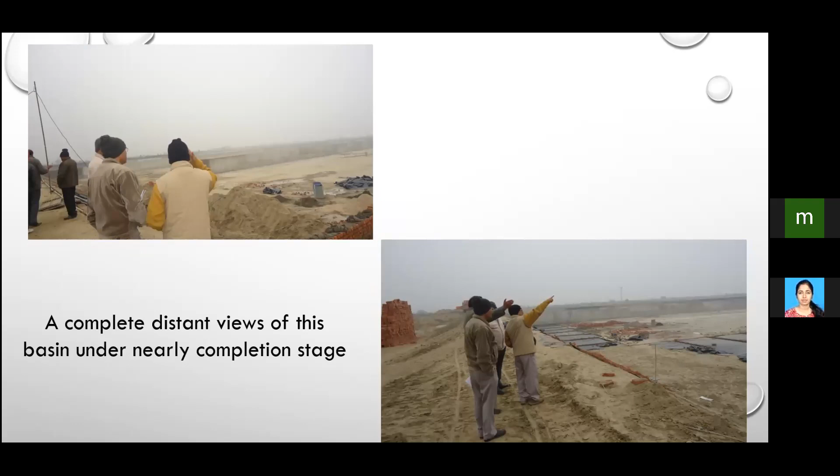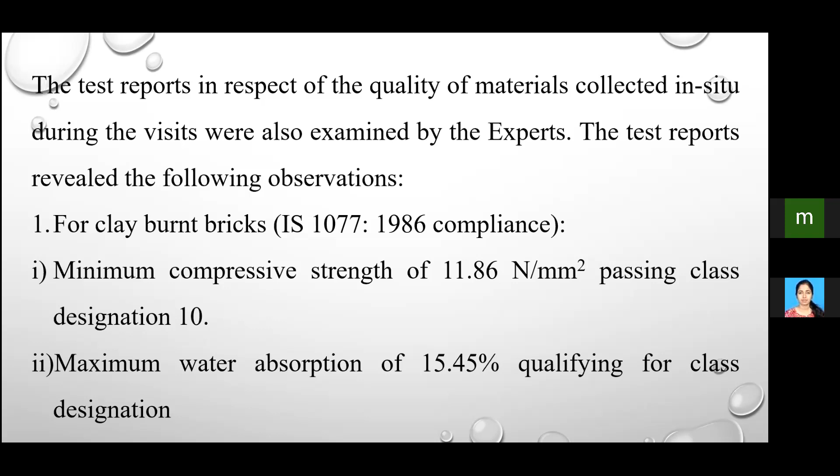Anyone? Hello? Hello? Yes, sir, we can see it.